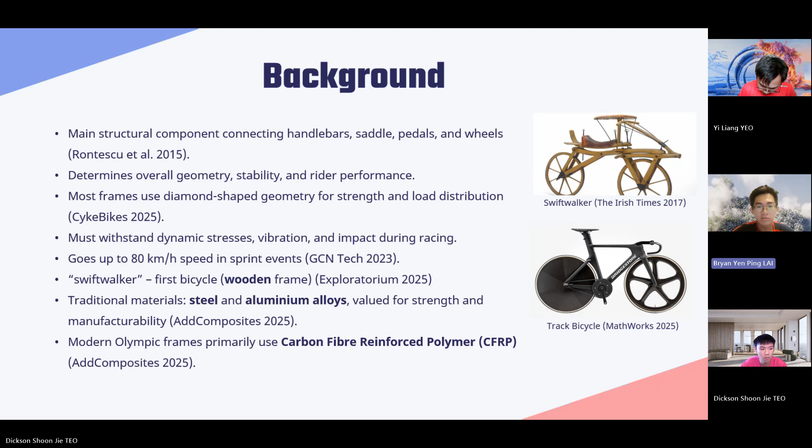The first bicycle is called the Swift Walker, which used a wooden frame. The traditional materials are steel and aluminum alloy, valued for strength and manufacturability. In modern times, frames are using carbon fiber reinforced polymer. The application used in Olympic track cycling events is lightweight. Lightweight can bring acceleration, climbing efficiency, and increase overall speed.

Regarding bicycle design, stiff frames can improve power transfer, maximizing cyclist performance, and aerodynamic tubes reduce air resistance, which can increase the bicycle speed. So, moving into the key performance requirements. A high strength to weight ratio: the frame must resist high pedaling load while remaining very light for speed and acceleration. Having a high stiffness can minimize frame flex to improve power transfer and responsiveness, especially during sprints.

Having a good fatigue resistance is essential to withstand millions of loading cycles during training and competition without cracking. Material and shape must be manufactured to allow efficient tube forming or joining to achieve precise geometry and equal quality. An aerodynamic frame is efficient, minimizing drag to allow higher speed with less energy in sprinting and time trial events. And that's all from me.

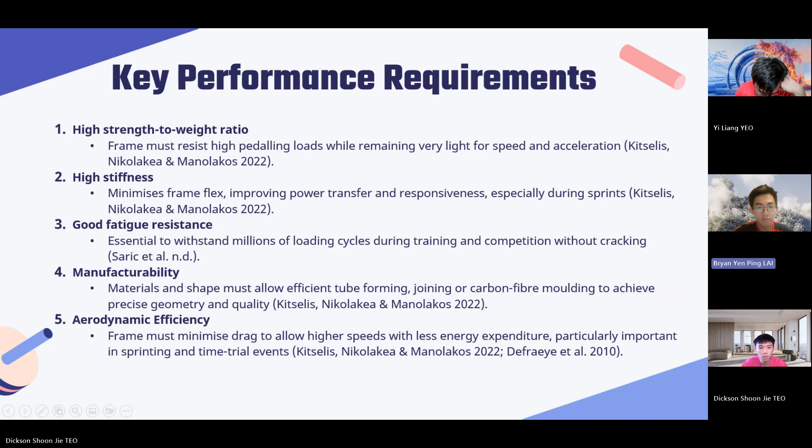Thank you, Bryan. After identifying the key performance requirements, let's compare two candidate materials for the bicycle frame, which are 6061-T6 aluminum alloy and T700S carbon fiber reinforced epoxy composite. Starting with strength to weight ratio, the aluminum alloy has a density of 2.7 grams per cubic centimeter and a tensile strength of about 370 megapascals. CFRE, on the other hand, is much lighter at 1.8 grams per cubic centimeter and has a higher tensile strength of 2,860 megapascals along the fiber direction.

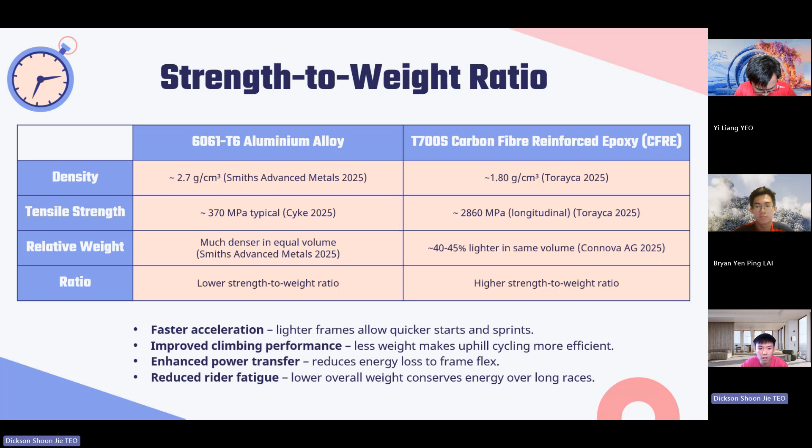This difference means CFRE offers a far superior strength to weight ratio, which is critical for Olympic track cycling. A light frame accelerates faster, improves climbing efficiency, and reduces rider fatigue over long races. In fact, CFRE frames can be up to 40 to 45% lighter than aluminum alloy for the same volume, giving athletes a real competitive edge.

Aluminium's Young's modulus is around 68.9 gigapascals, while CFRE reaches 134 gigapascals longitudinally, which is almost double. Higher stiffness means less frame flex, so more pedaling energy is converted into forward motion instead of being lost to deformation. This improves power transfer and responsiveness during sprints. CFRE also allows directional stiffness tuning through fiber orientation, which aluminum cannot achieve.

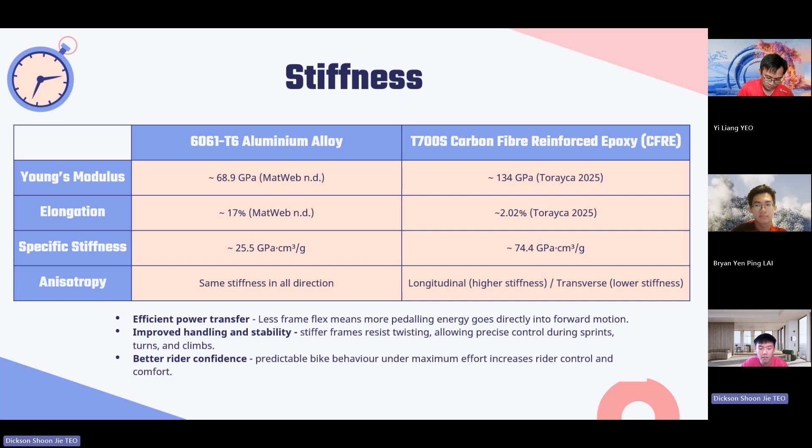Engineers can design frames that are stiff in the bottom bracket for efficient power transfer while keeping the seat stay slightly compliant for comfort. This level of customization is a major advantage for performance optimization. Fatigue resistance is another key factor. Aluminium typically has a fatigue limit of about 97 megapascals, whereas CFRE can withstand up to 400 to 800 megapascals under cyclic loads. This translates to a much longer lifespan under extreme racing conditions.

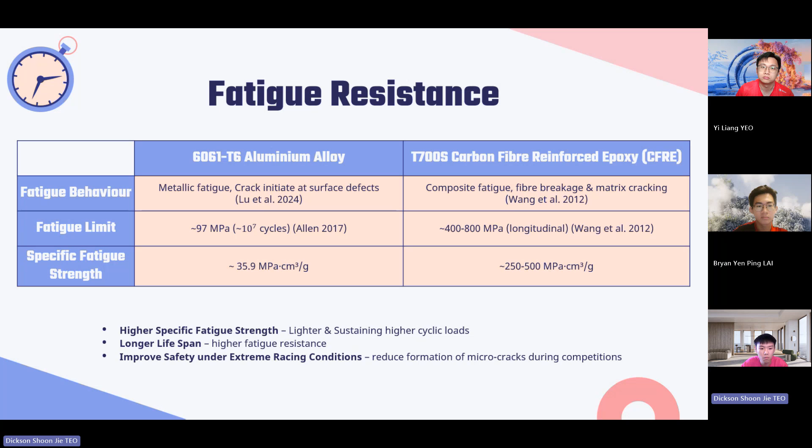CFRE's composite structure resists crack propagation better than metals, reducing the risk of sudden failure. For elite athletes who train and compete at high intensity, its durability ensures consistent performance and safety. It also means fewer frame replacements over time, which offsets some of the initial costs.

However, manufacturability and cost present trade-offs. Aluminium frames are easier and cheaper to produce, at only around 2,899 ringgit per frame, using well-established welding and machining processes. CFRE frames cost roughly 9,977 ringgit and require complex layup, resin infusion, and autoclave curing.

Repairability is also a challenge. Aluminium can be welded, while CFRE often needs specialized repair techniques and sometimes full replacement. Production rates are also slower for CFRE, making it less accessible for mass market bikes. However, for Olympic level performance, these trade-offs are often justified by the performance gains.

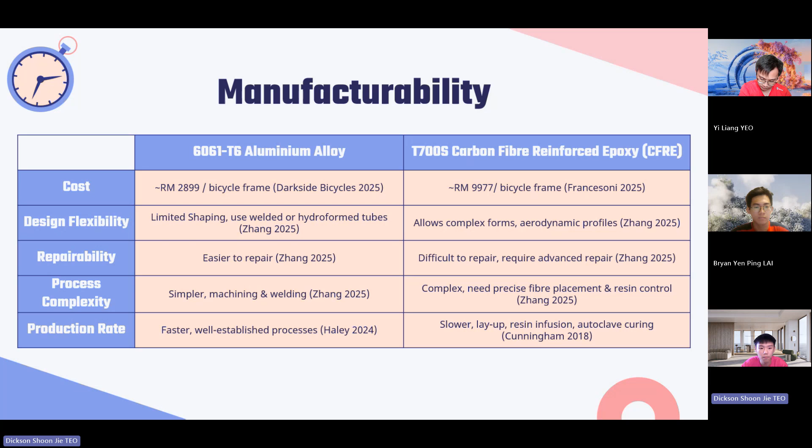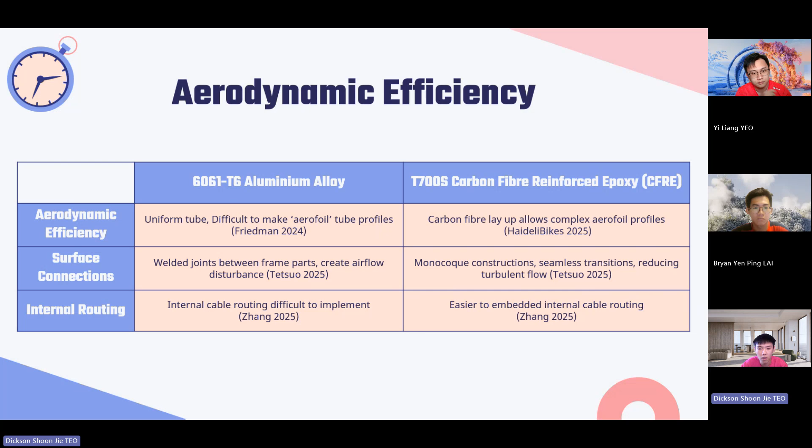Finally, aerodynamics. Aluminium frames are limited to simpler tube shapes and weld joints, which can disturb airflow. CFRE allows seamless monocoque construction and complex aerofoil profiles, reducing drag and improving speed, which are critical for Olympic track cycling. Next, I will pass the time to Yi Liang.

Thank you very much, Dickson. Next, we're moving on with the final material that we selected. Throughout the comparison, we've selected T700S carbon fiber reinforced epoxy, CFRE, as our material to make our Olympic bicycle. So let's talk about the benefits.

It has a higher strength to weight ratio compared to aluminium, being around 40 to 45% lighter than aluminium. Also the tensile strength is 2,860 megapascal, which is greater than aluminium's 370 megapascal. The greater the tensile strength, the better the material is.

Moving on with the higher stiffness of carbon fiber reinforced epoxy, it has a Young's modulus of 134 gigapascal, and the specific stiffness of CFRE is around 74.4 gigapascal cubic centimeter per gram, which is 3 times better than aluminium. Next is the higher fatigue resistance, with a fatigue limit of around 400 to 800 megapascal, which is really outstanding compared to aluminium.

And lastly, we have the aerodynamics and design. CFRE enables workers to build more complex and aerodynamic shapes for bicycle frames. And due to its light weight, it's ideal for high-speed performance. However, there's a trade-off: it costs more compared to aluminium and it's complex to manufacture and repair.

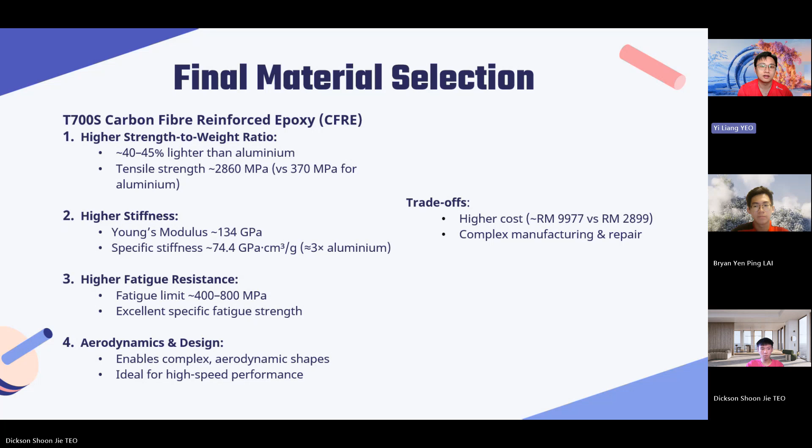Moving on with the sustainability and socio-economic considerations. Let's talk about long-term sustainability first. It has been separated into two parts: the carbon footprint, and end-of-life management and recycling challenges. For the carbon footprint, manufacturing is highly energy intensive. It requires around 100 to 150 megajoule per kilogram of energy, which emits around 10 to 20 kilograms of carbon dioxide per kilogram of fiber, causing a higher impact compared to aluminium alloy.

Next, let's talk about end-of-life management and recycling challenges. CFRE uses epoxy that cannot be remelted. This makes the recycling process very complex. Currently, 90% of end-of-life carbon fiber sport equipment ends up in landfill. There are several recycling methods for CFRE, which are pyrolysis and solvolysis. However, they're really costly and require large amounts of energy.

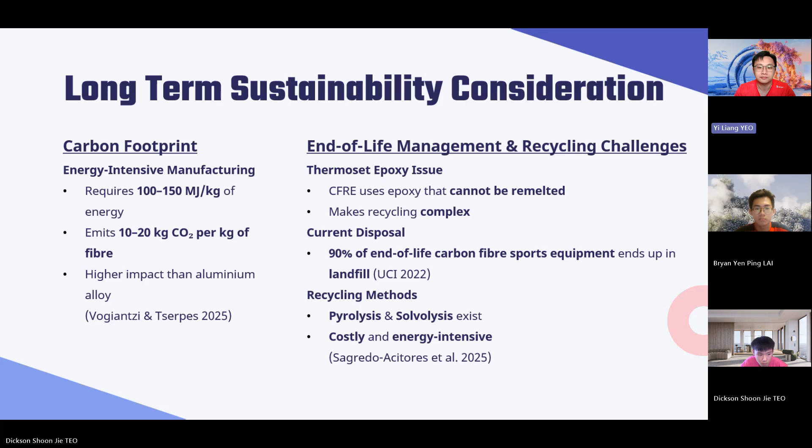Moving on with the growing demand: despite sustainability concerns, the use of CFRE has been growing by around 25%, which means more and more people have access to CFRE frames. In the future, recycling initiatives could create several opportunities, such as creating jobs and reducing costs. And that's all from me. I'll pass it back to Bryan.

Thank you, Yi Liang. I'm Bryan. In conclusion, carbon fiber reinforced epoxy, CFRE, is the optimal material. It has a superior strength to weight ratio, being lighter and stronger than aluminium; high stiffness for efficient power transfer and improved handling; excellent fatigue resistance for a longer lifespan under extreme racing conditions; and it enables aerodynamic and complex designs for maximum speed.

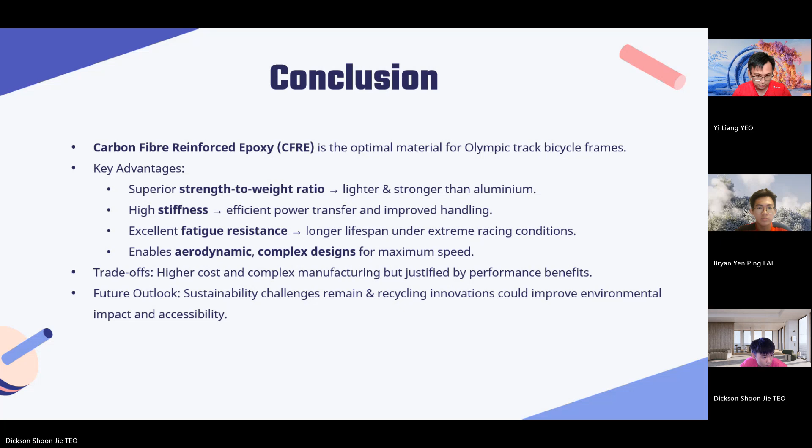However, it requires a higher cost and complex manufacturing, but this is justified by the performance benefits. Sustainability challenges remain, and recycling innovation could improve environmental impact and accessibility. And this is our list of references.